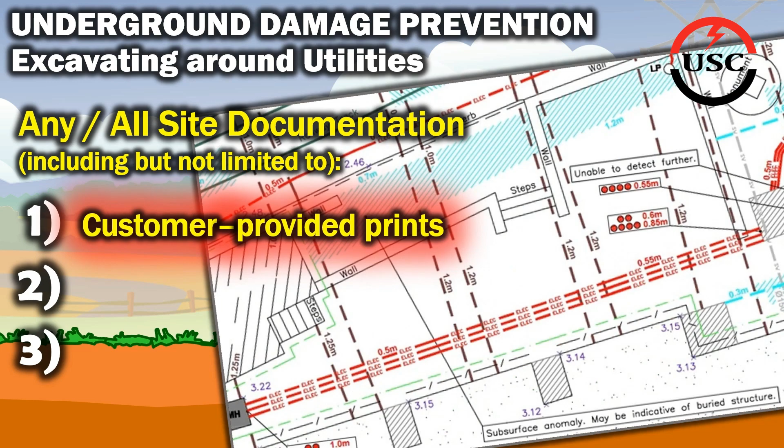Whenever excavating around underground utilities, always review any documentation relating to that site. Examples include any customer-provided prints, redline drawings from a previous crew, and, of course, the dig ticket. Before even thinking about doing any kind of excavation around an underground utility, always review that dig ticket first.

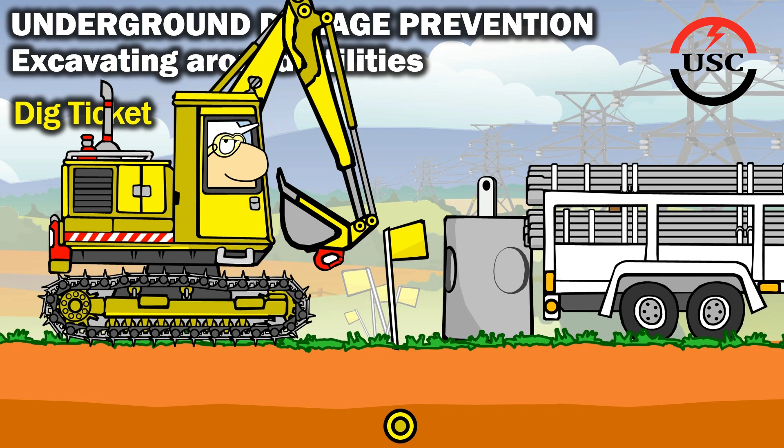Because if the dig ticket isn't good, then absolutely no excavation may be conducted on site. You may as well not even waste the time and effort unloading the tools, equipment, and materials. That dig ticket must be valid before any excavation begins on site.

To be considered a valid ticket, any and all excavation cannot begin before the start date and time listed on that ticket. No excavation may begin or continue past the expiration date listed on that ticket. All excavation work on site must be conducted within the geographical parameters defined on that ticket.

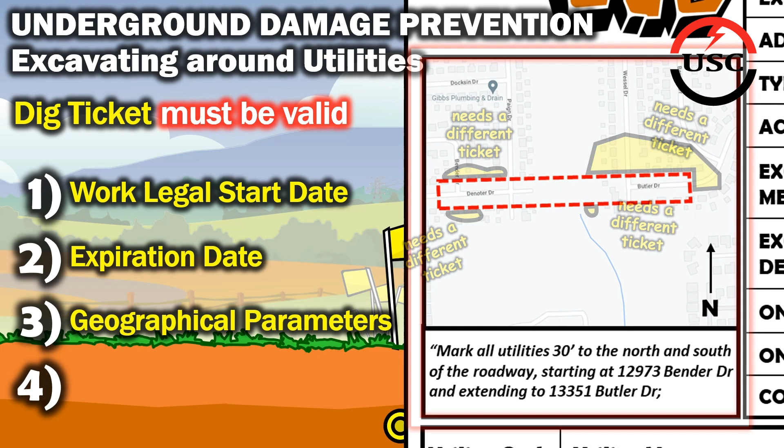If additional excavation needs to be conducted outside those defined geographical parameters, then another dig ticket request must be submitted for the area where the additional excavation work is to be conducted. All utilities must have documented responses in the affirmative before any excavation may begin on that site. Verbal OKs are not acceptable responses.

If we hit any underground utility, and I do mean any underground utility, on a verbal OK, we may as well write them a blank check because it's going to be their word against ours, and they are not going to want to pay for repairs any more than we do. Do not accept any verbal OKs.

If the locator or utility owner is claiming they cannot update their response due to a glitch with the one-call system, then get them to confirm it in an email, complete with the dig ticket number. That way, should it hit the fan, you'll have the individual's name, the documented OK, date and time of the documented OK, and the actual ticket number.

And please, double check that the dig ticket numbers match. If they decided to pull a fast one and change even one of those numbers in that email, then we own that hit. Finally, know your individual state laws when it comes to these dig tickets in the one-call systems.

Some states require a 2-day lead time, some require a 3-day lead time. Some require the excavation must begin within 14 days of that ticket's listed start date and time, while others don't. Some state tickets have defined lifespans, others are immortal. Again, know your state's laws.

Now compare that ticket to the site. Identify the caution zone or the tolerance zone for the marked utilities. This is the area within 60 inches of that marked utility. If there is any excavation to be conducted within the 60-inch zone, then that marked utility must be located using soft excavation methods.

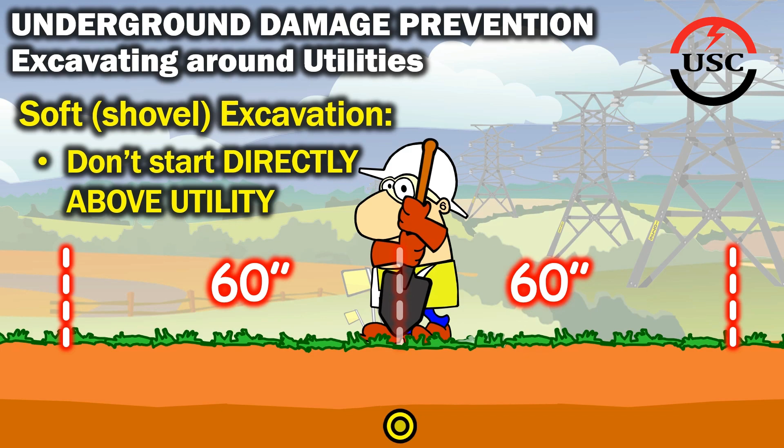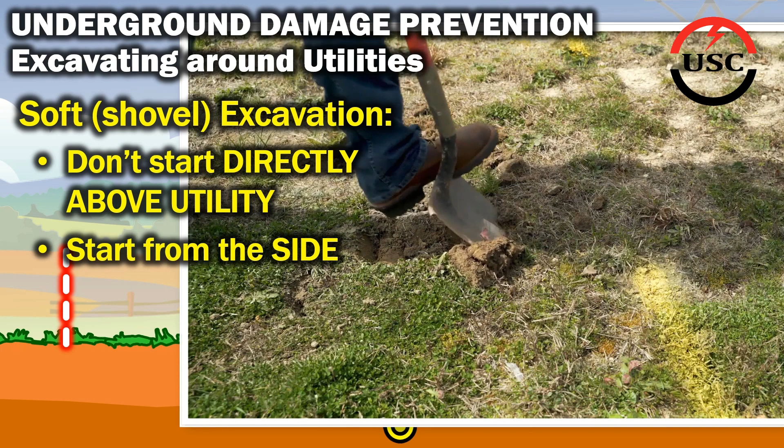Granted, the utility markings may not be accurate, but exercise due diligence and don't start digging directly above the markings. Starting here is greatly increasing the chance of damaging that utility. Start from the side and work your way toward the utility. This may take some additional time and effort, but it's a hell of a lot faster than having to shut down the job and fill out an incident report.

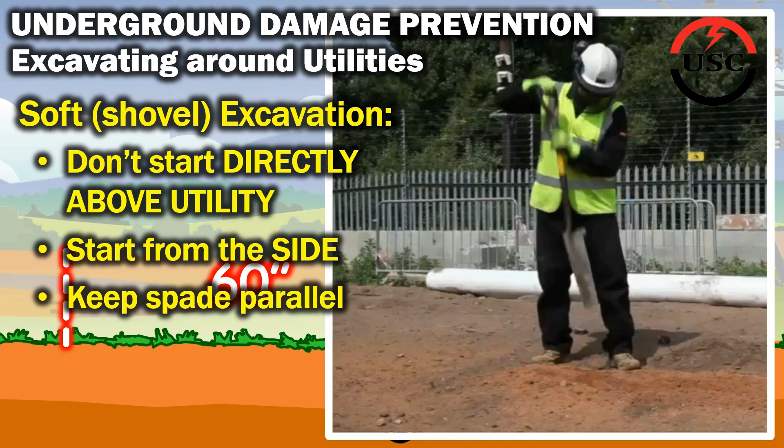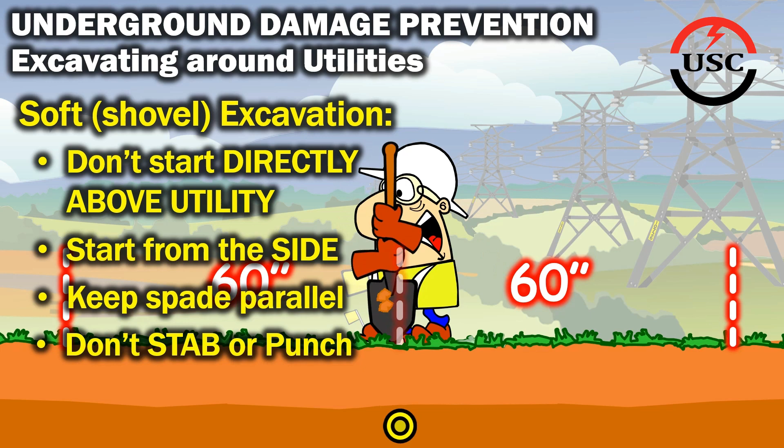Keep the spade parallel to the utility as opposed to perpendicular. Doing so reduces, not eliminates, reduces the chances that the spade will be chopping that utility in half or breaching the line. Whenever possible, make an effort not to punch or stab that spade into the soil. Doing so greatly increases the potential of damaging the utility, which again is another reason why you want to keep that spade parallel to the utility.

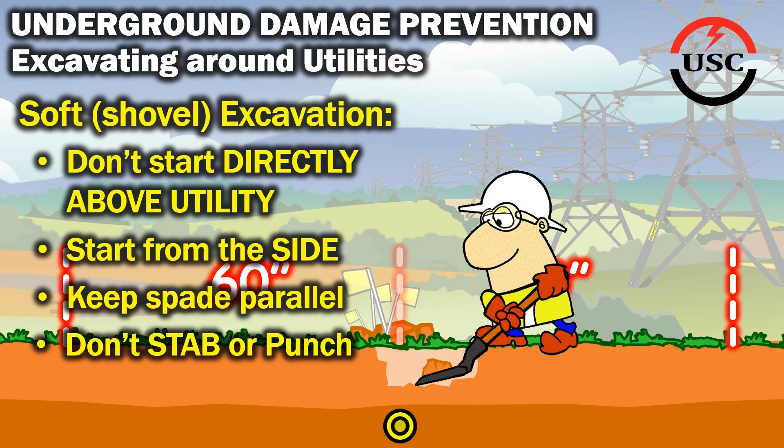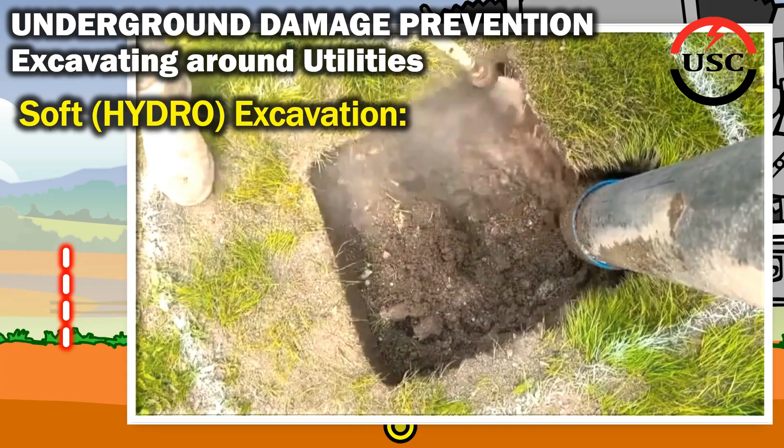Yes, this is obviously dependent on soil conditions, and if the soil conditions make shovel excavation all but impossible or too much of a risk, then consider the use of the hydro excavator. The hydro excavator truck, or vac truck, uses water and vacuum pressures to excavate the soil at pressures that can be adjusted so that they are insufficient to damage the underground utilities. High-pressure water jets loosen the soil, turning the soil into a muddy, slurry mix.

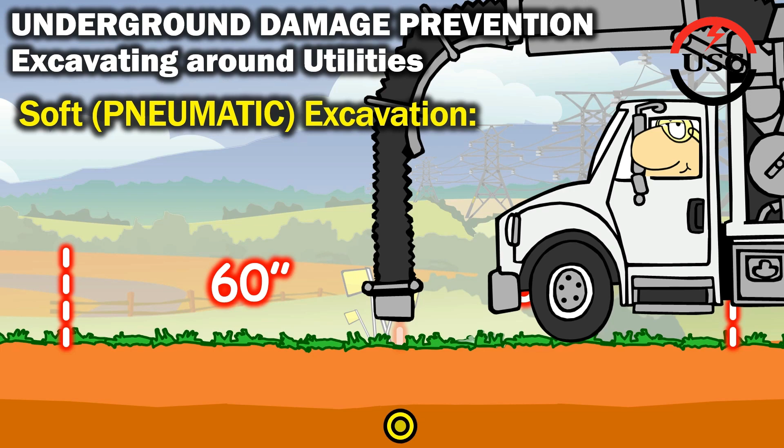The powerful vacuum then removes that loosened water and soil, leaving existing utilities intact and undamaged. Another option is pneumatic excavation. There's a couple of different varieties of this. One is referred to as the air wand or air spade or even the air knife. This pretty much just blasts focused streams of compressed air into the soil, breaking it loose and displacing it.

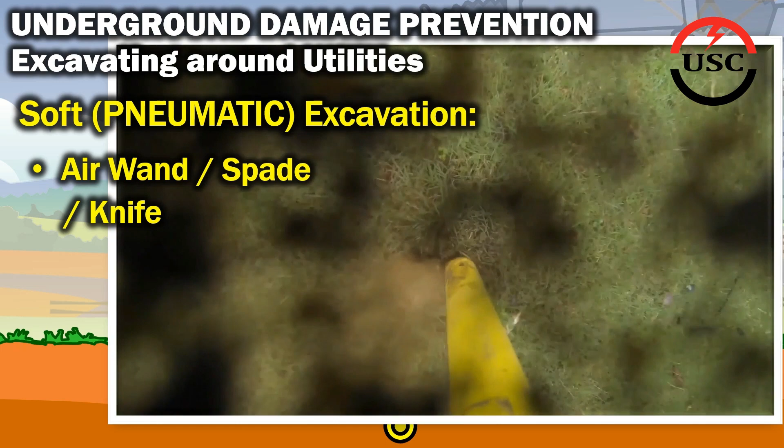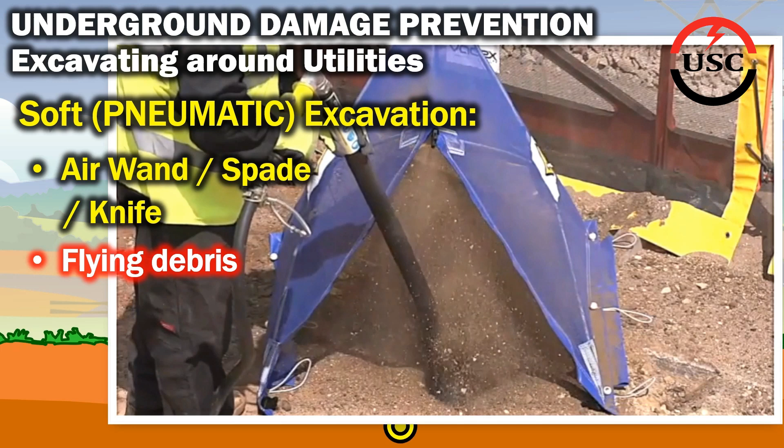The downside is flying debris. Hydro excavating has its fair share of flying debris, but the effects are multiplied when using this form of pneumatic excavation. Environmental conditions may eliminate this as an option for your particular job site, such as substation environments where flying debris runs the risk of chipping or breaking exposed glass insulators, or when the public may be exposed, where debris can strike pedestrians or chip car paint.

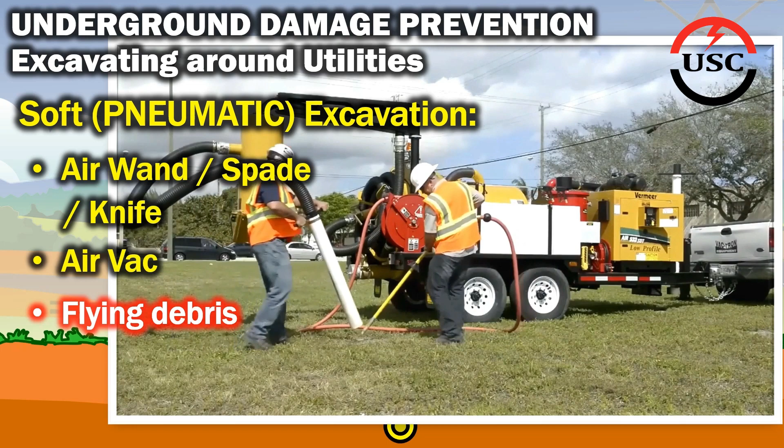A variant of this method is the air vac. Now the air vac is pretty much like hydrovacing without the water. The benefit here is that instead of having to haul the slurry off-site and hauling backfill on-site, you can just turn around and use the very same soil that you displaced as the backfill. And of course, since the soil is being sucked up with the vacuum hose as it's being blasted free, the hazards of flying debris are significantly reduced.

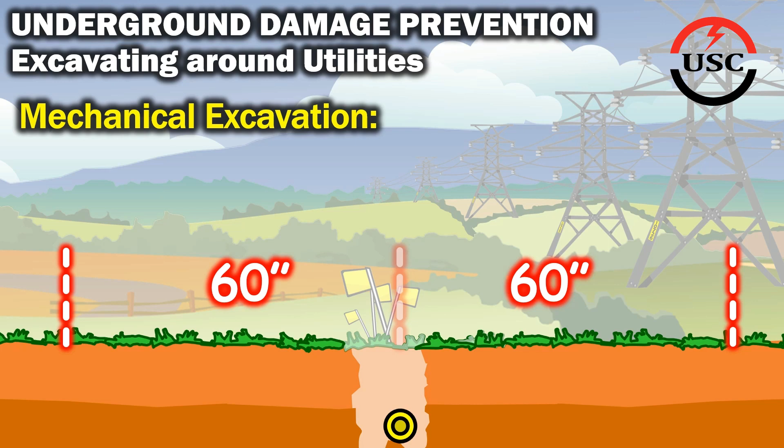Once the utility has been located and exposed, then mechanical excavation may begin as long as methods are used to prevent any contact between that utility and the excavating equipment. Always use a spotter to monitor mechanical excavation and to provide the necessary guidance when the equipment is operating within the 60-inch caution or tolerance zone of that exposed utility.

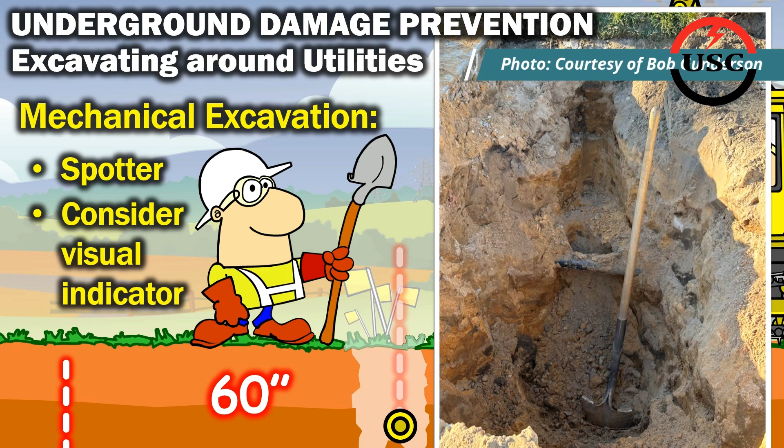Placing a shovel between that exposed utility and the ongoing mechanical excavation provides a barrier of sorts for that utility, but more importantly, it serves as a high-vis marker for the operator, indicating the utility's actual location, so that if during the mechanical excavation that shovel should move, then the operator can pretty much assume that the utility has also been affected, and can conduct an all-stop before things get out of hand.

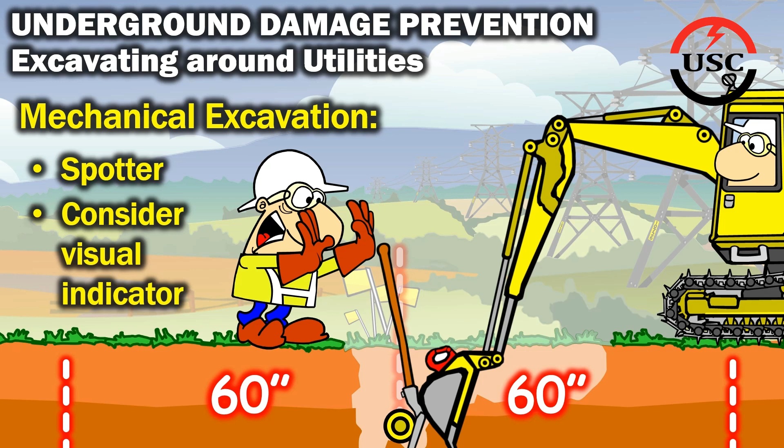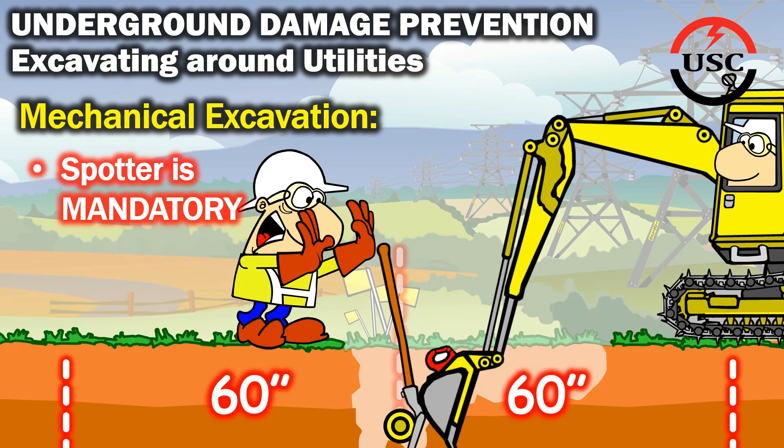Regardless of all of these requirements, however, the spotter is still required to be present and must have eyes on that utility whenever mechanical excavation is being performed within the 60-inch caution or tolerance zone of that utility. If during the course of a mechanical excavation the spotter loses line of sight with that utility, then all excavation must stop, just like when backing a vehicle. The spotter losing sight of that utility may be as simple as the spotter's perspective has changed, or maybe some soil has caved into the hole, or the equipment operator may have inadvertently piled spoils up and over the utility.

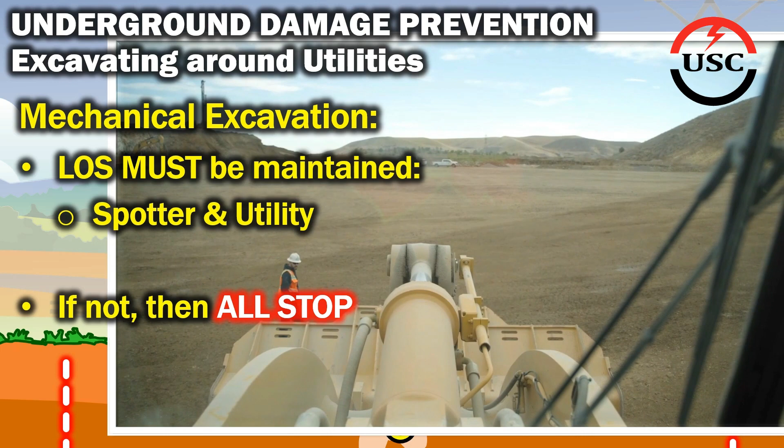Not only must there be an open line of sight between the spotter and the exposed utility, there must also be an open line of sight between the spotter and the operator. And just as it is between the spotter and the utility, if the spotter and the operator lose sight of one another, then all work must stop until that line of sight can be reestablished. Whatever the case, it doesn't matter. All work must stop. The issue must be rectified so that the spotter, once again, has eyes on that utility before any mechanical excavation resumes.

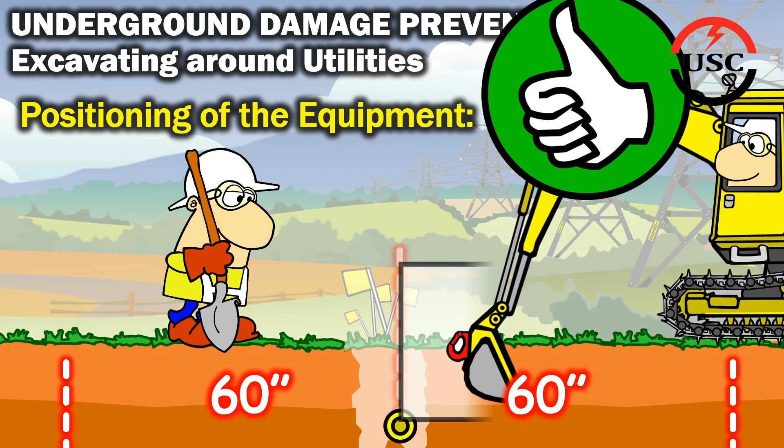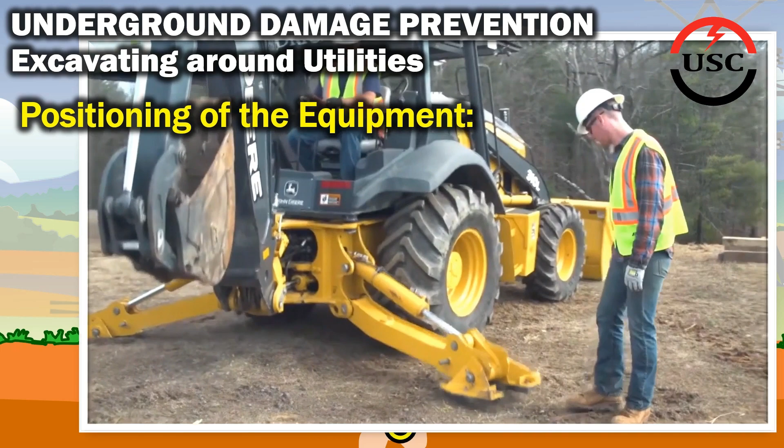A few final points when conducting the mechanical excavation. Always position the equipment so that the spoils are being pulled away from the utility. This significantly decreases the potential of a bucket tooth snagging the utility, or objects in the spoils, like rocks or stones, being pushed up against and potentially damaging the utility. It also keeps the spotter from having to get closer and closer to that struck-by and crush zone created by the moving boom, just so that they may maintain a line of sight with the utility.

And finally, communication. Granted, the official hand signals are highly recommended when utilizing hand communication between the spotter and the operator, but they are not mandated. Unofficial hand signals may be used as well, just as long as there is an effective means of communication maintained between both the spotter and the operator at all times.

Be aware that whatever hand signals are used, they must be agreed upon by both the spotter and the operator before operations begin. So, although the rolling booger is not an official hand signal, if both the spotter and the operator agree that this means proceed very slowly, then by all means, roll boogers.